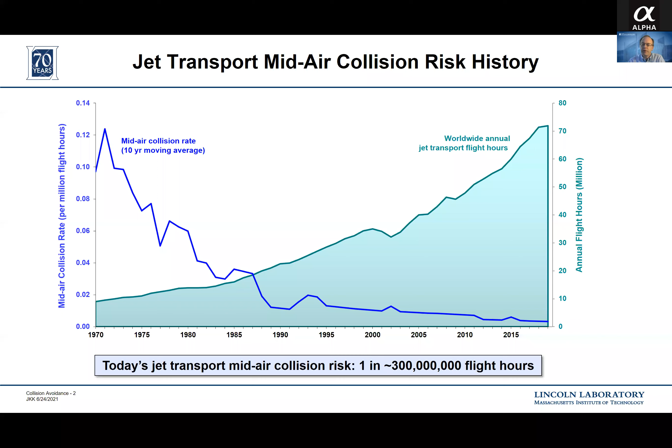If we go back to the earlier years, in the 1950s, there was a very bad mid-air collision over the Grand Canyon, 2 flights flying from the West Coast to the East Coast. At the time, the technology for separating aircraft was very procedural. Aircraft were given altitudes and routes to fly. They periodically would call in on the radio to report their position. And in the best case, there was somebody moving a little marker on a map to see where the planes are and maybe give some changes in their trajectory if necessary.

Obviously, that doesn't hold up very well in the long term with a lot of traffic. And so this mid-air collision really raised awareness in the country that there needed to be a more complete air traffic control system. In fact, that led to the establishment of the FAA. This is one of the precipitating events that got the FAA started. And coming from the FAA, a number of air traffic control technologies followed.

And so this again raised additional awareness that there needed to be yet more protection for this type of an accident. And so there was a congressional mandate for an independent collision avoidance system to be installed on large aircraft by the mid-1990s. And so that led to the airborne collision avoidance technology that I'll be talking about today.

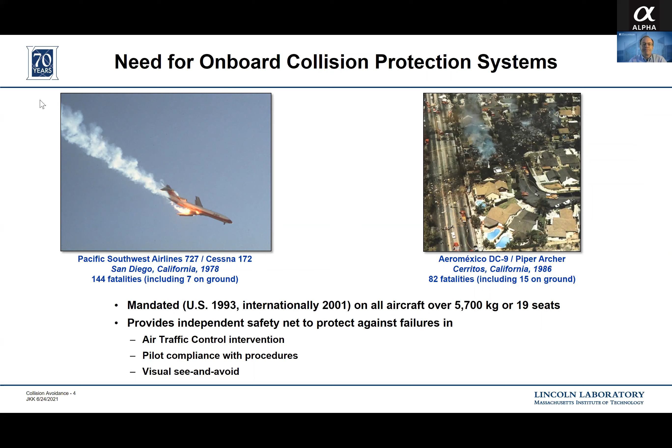And when necessary, air traffic controllers are monitoring the traffic. They may provide directions to the pilots to change heading or altitude or speed to maintain separation. And the goal there is to keep aircraft well separated, typically 3 or 5 miles apart. So there's a lot of space between them and a good safety margin. And for the vast majority of time, that's sufficient to keep aircraft safely separated. But should there be some sort of issue where aircraft do get close, that's where TCAS comes in.

And TCAS itself provides 2 layers. There's what's called a traffic advisory, or TA, which about 45 seconds before a collision would happen, issues a visual indication in the cockpit and also says traffic. And the intent there is to make the pilot aware that there's another airplane nearby. If the weather's nice, they can look out the window and try to find that traffic and make sure that things are going okay in terms of staying separated.

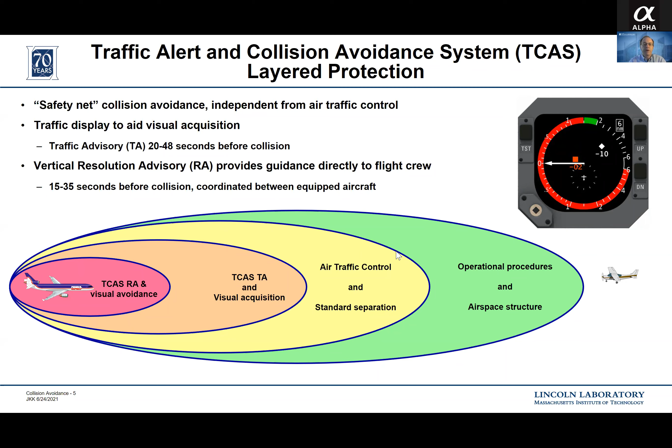And the other aspect of TCAS that was built in is that it's coordinated, so that if 2 aircraft have TCAS, if one climbs, the other airplane will descend, so that they're not both doing the same thing. Obviously, that's an important consideration. So there's sort of a few main components to TCAS. There's a surveillance component, which is obviously needed to know where the other airplanes are and track them over time. So there's technology that was developed to perform that, detecting intruders, what we're calling intruders are just other aircraft, and track them over time.

There's a set of algorithms that then use that information to decide, first of all, does the system need to do something? Do they need to bring the intruder to the attention of the pilot? If they do, what should they tell the pilot to do? Should it be a climb or descent? And then to coordinate that with the other airplane, if the other airplane also has TCAS, like I said.

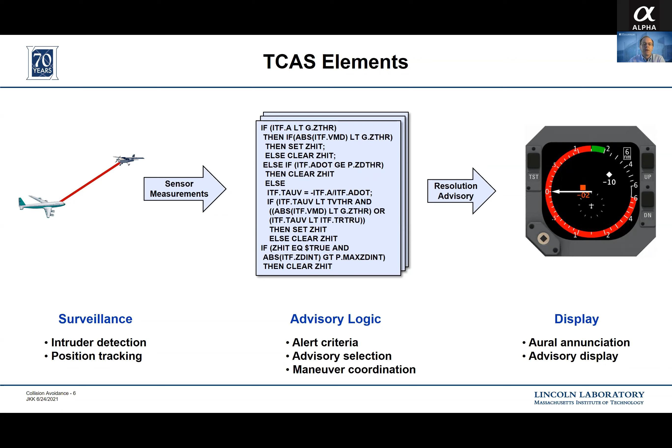And then the third component is the display in the flight deck. There's typically a traffic display and then some other display that tells the pilot what to do, whether to climb or descend. And I'll show an example of how that works in a minute. So this is a system that was decades in the making.

There have been several updates to that system. The first system deployed was called version 6.04a, and then there was a version 7 and 7.1. And most recently, there's a version of collision avoidance called ACAS X that I'll talk about towards the end of the presentation today.

And I'll also be talking a little bit about some of the other work that was going on, both in terms of modeling and simulation to build the system, and then flight testing to demonstrate that the system in real life operated with the same performance as had been assumed in some of the models. And then there's additional work in coordinating the maneuvers through the data link, assessing how well the system's working in operations, and making some additional improvements in the surveillance technology.

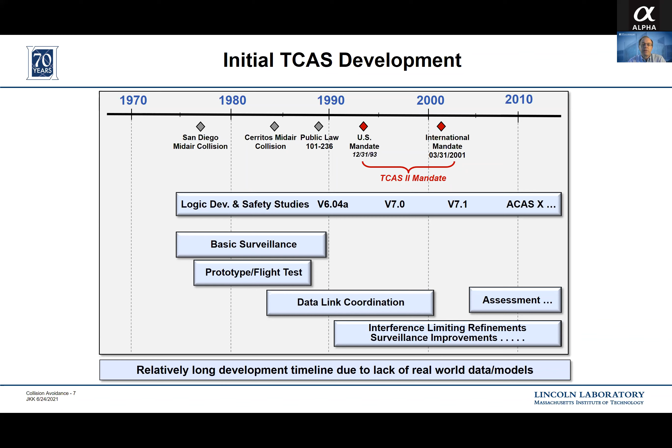So I'll talk a little bit about first the surveillance component, and I'm going to just touch on a few parts of this. But TCAS is based on the same surveillance technology as the rest of the air traffic control system was built on at the time, using transponders on the aircraft to help provide additional information to radars or other aircraft.

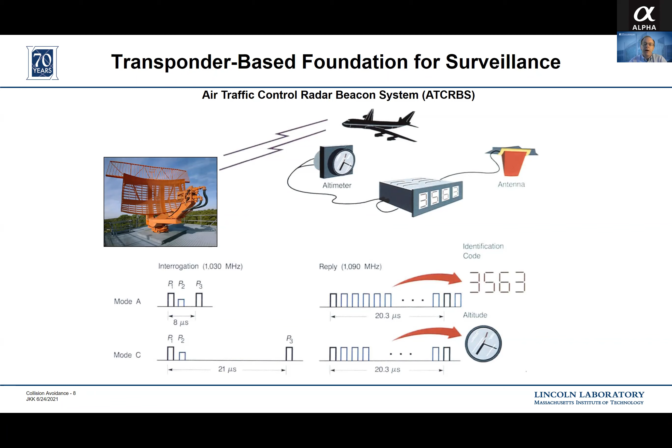Now, there's actually been some really interesting work done to extract as much as you can out of those overlapping messages, which I won't get into, but it's one of the challenges with that initial beacon system, that you have these overlapping messages potentially that make it more difficult to track aircraft.

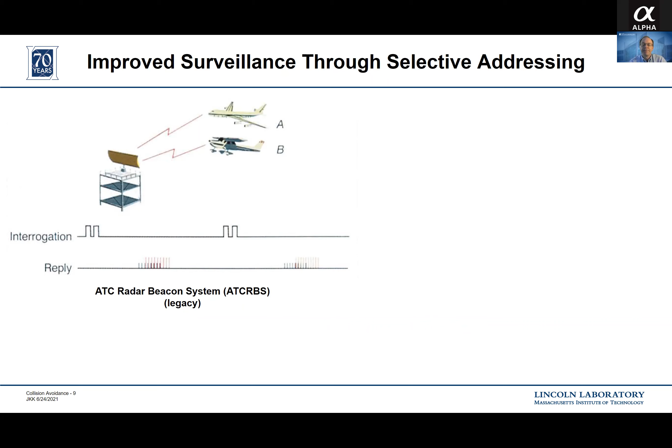So one of the technology improvements that was done was to develop what's called the mode select or mode S transponder system, which uses the same frequencies and the same basic waveforms and interrogations, and it's backward compatible with ATCRBS. But the interrogation message is a little different. It encodes a particular aircraft's identity so that you can interrogate specific aircraft now, and just that airplane, when it receives that code, knows that it's going to reply. And if a transponder receives some other airplane's code, it doesn't reply.

And instead of 4096 different codes, this uses a 24-bit ID, which is many times larger. Each airplane has a unique code. It's basically built into the transponder what its ID code is. So every plane in the world has a different 24-bit ID.

And that allows a radar, like I said, once it knows who's out there, to interrogate airplane A and then schedule an interrogation for airplane B. And the radar technology is smart enough to space those interrogations out so that the replies won't be overlapping. And so that's really the fundamental technology here that allows radars to track different aircraft reliably and get data from each aircraft uniquely.

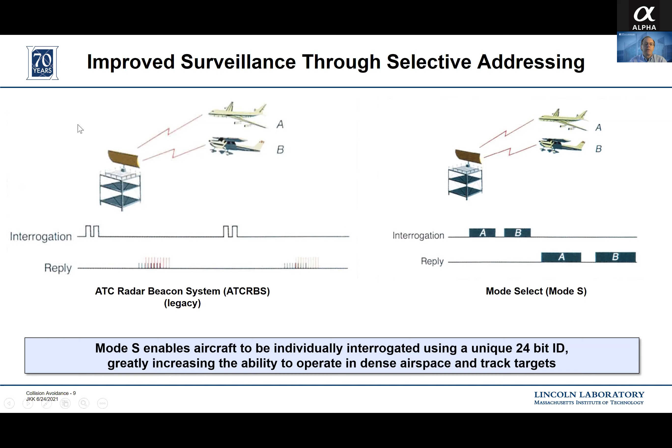So that's basically how TCAS works in its surveillance. So again, it's independent of ground radars. It does it all by itself on the aircraft. It will detect and track airplanes automatically that are flying around.

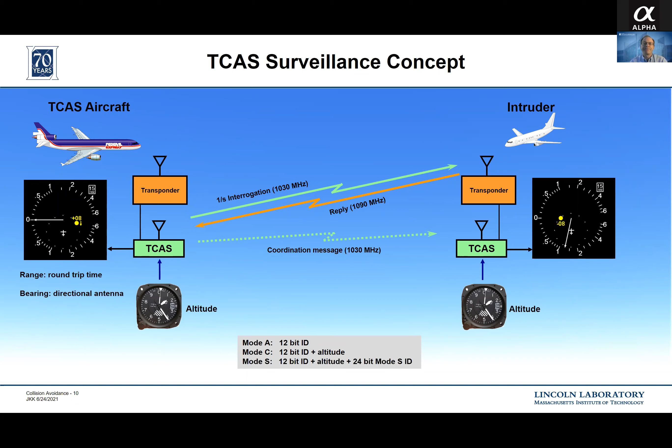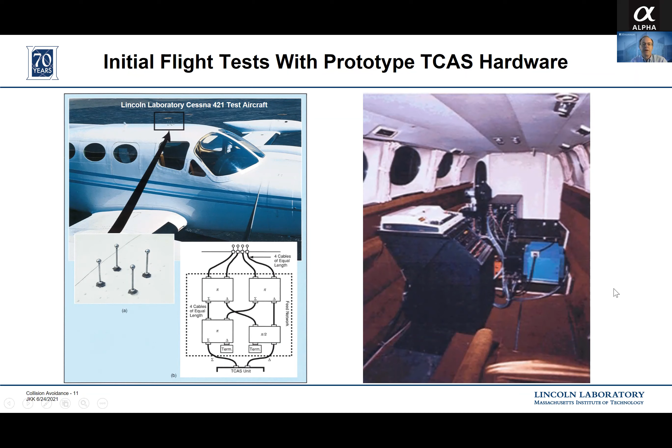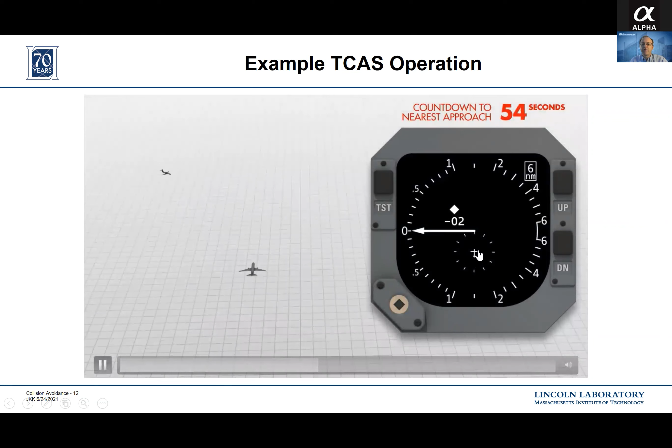So I'll just show an example of how this works. So this is running a little animation here. We've got 2 planes coming. And again, as you can see here, this jet airplane is this little cross. This other airplane is 200 feet below us. It's at about our 11 o'clock position and getting closer. And I don't have the sound turned on, but when it gets about 46 seconds away or so, again, TCAS is tracking that and says, hey, you're getting a little close here. I'm going to warn the pilots about this other traffic.

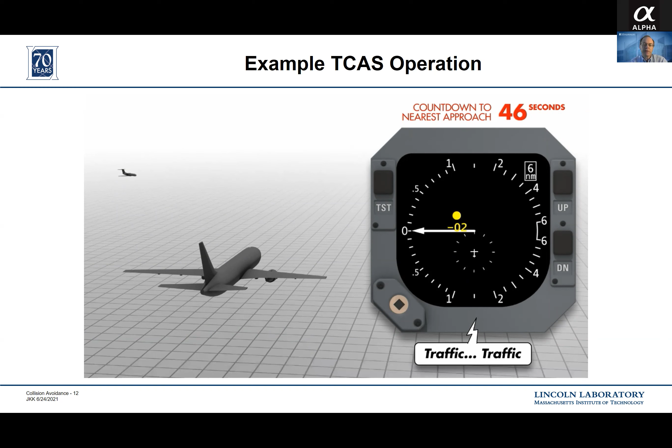And so it says traffic, traffic. The symbol turns to a yellow circle to help highlight that. And at this point, the pilot then can start looking out the window or start asking air traffic control what's going on, or just be ready to do something if things get worse.

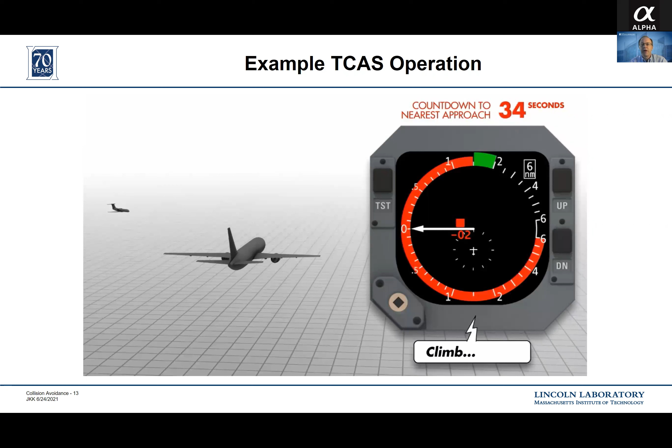And if things do continue to sort of degrade as the planes get closer together, the system continues to track, and at some point it decides that this is getting too close, and it issues this resolution advisory. In this case, it's saying climb, climb, and this display has sort of two aspects to it. It's a very complicated display in some ways.

It is showing not only sort of a top-down view of where the traffic is, but then this dial on the outside is the vertical speed indicator. So this arrow is indicating whether the aircraft is climbing or descending. Right now we're level. And what this red arc is telling the pilot is that they need to increase their climb rate until they get to the green. So basically to 1,500 feet per minute or more.

So the pilot would disconnect the autopilot and pull back on the yoke and then start to climb. And you can see the vertical speed starting to increase. As the plane climbs, the other airplane is getting farther below. So that's a good sign. It's now 500 feet below.

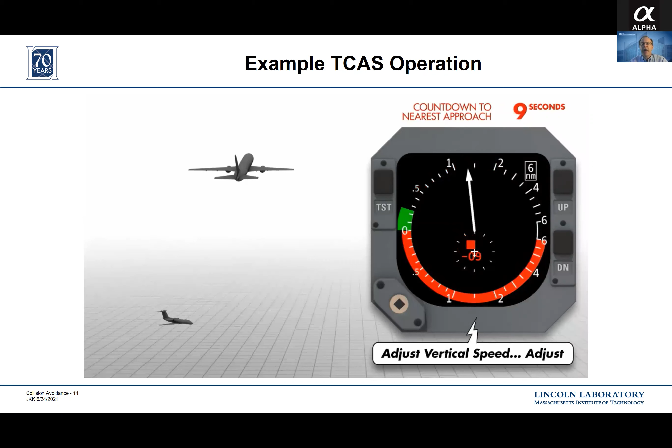And when it gets far enough away, the system says, okay, we've gotten enough separation now, things are safe, and you can return back to level flight. And then once you actually start to increase in range, the system says, okay, now the situation is cleared and you can go on back to your original clearance and fly along. So that's basically how the system operates.

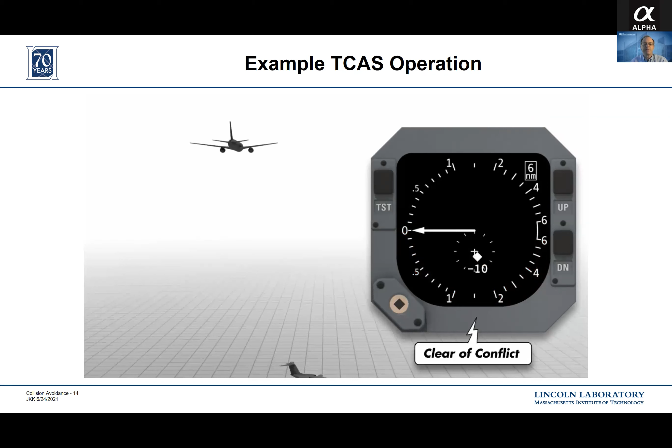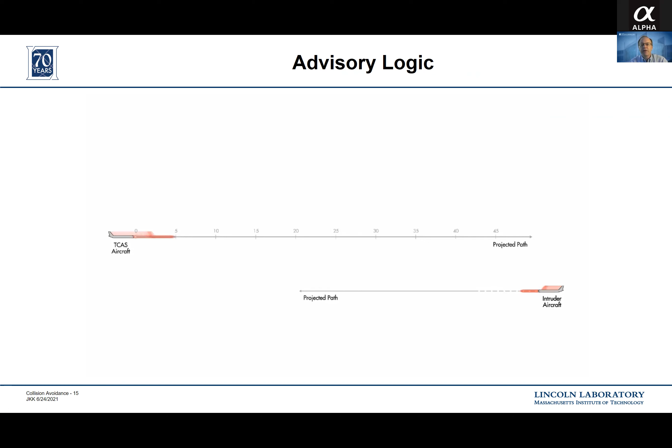And then internally what's going on is, TCAS, a little simplification here, but it's basically doing a straight line projection based on what the system knows about what your own airplane is doing and what it's finding out from this tracked airplane. So it projects ahead in time and looks to see where along those straight lines those planes are going to be closest and how far apart they are going to be vertically.

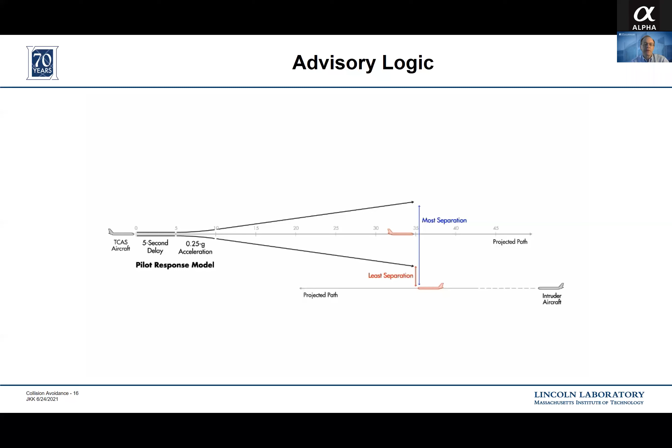And if that's a small enough miss distance that the planes are going to be too close, then it runs another algorithm to basically look and see should we climb or descend to avoid this threat. And that model assumes it's going to take about 5 seconds for the pilot to react to the resolution advisory and then climb to that 1,500 foot per minute climb or descent rate. And the system will select the sense, climbing or descending, that gives the most separation. So in this case, it looks like a climb would be better than descending.

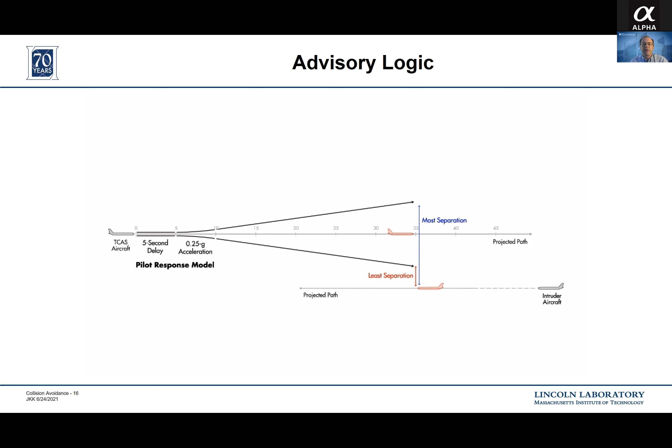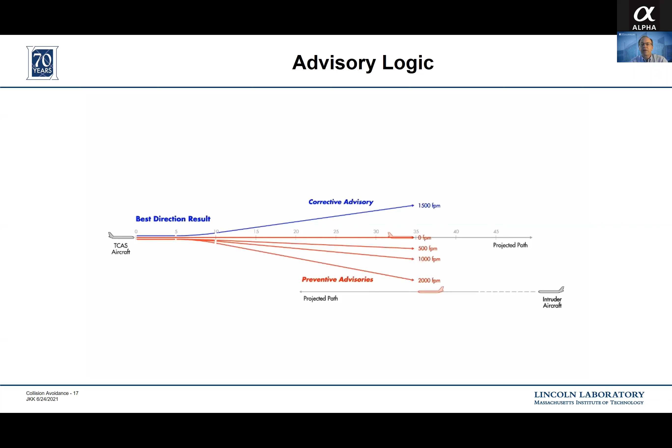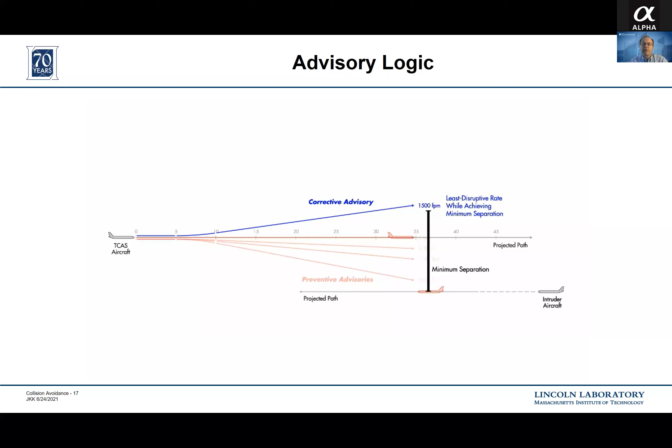And then it will actually evaluate a few different alternatives to see if maybe something a little bit less aggressive is still sufficient. So it will look at not just climbing, but maybe what if it just tells the plane to not descend or not descend faster than a certain rate? And it will sort of evaluate those against some minimum separation that it's trying to achieve. In this case, none of those more gradual advisories are sufficient. So here it would tell the plane to climb at 1,500 feet per minute.

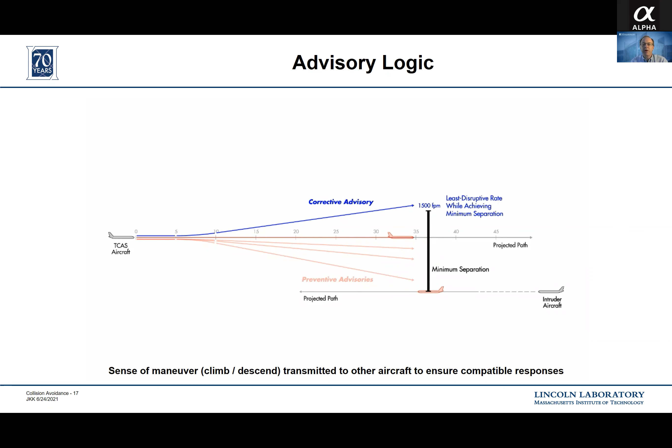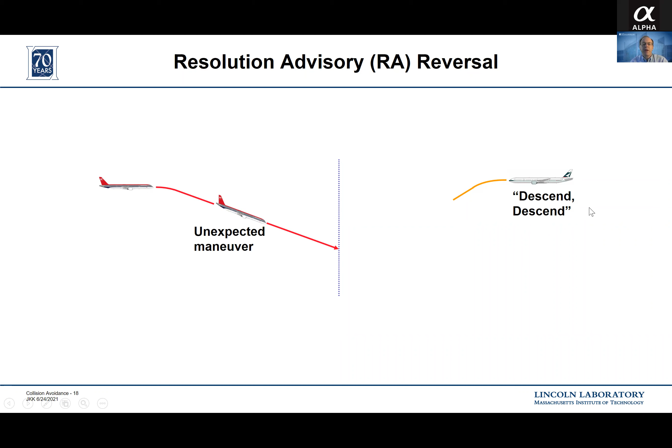And again, the sense of that maneuver, whether it's climb or descend, is communicated to the other airplane to make sure that it does the opposite. One other aspect of TCAS that's important is that it can reverse the sense of that advisory. So if one plane starts to say descend, and the intruder airplane does something unexpected, like it also descends for some reason, the algorithm can determine that and switch the sense to tell the plane, okay, this isn't working anymore. Instead of descending now, you need to climb.

And it gives a little bit more of an emphatic indication, climb now, to kind of get the pilot to change the sense that they were involved in. So that's the basic idea behind how TCAS works. And it's been extremely effective, a very strong component of what brought that collision rate down that I showed on the first slide of the presentation. There have been a number of cases that have been reported saves due to the system intervening.

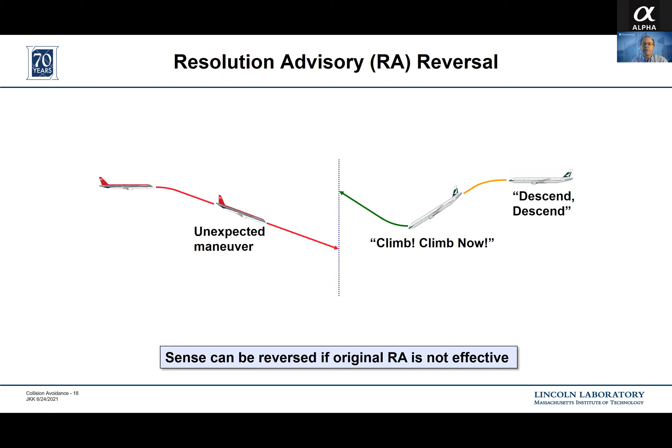However, there have been some issues. So there was one accident in 2002 where a Russian passenger jet collided with a cargo aircraft. This was in the middle of the night over southern Germany. And what was especially troubling was that both aircraft had TCAS on board. So obviously, a lot of concern and scrutiny over what was going on and why this happened.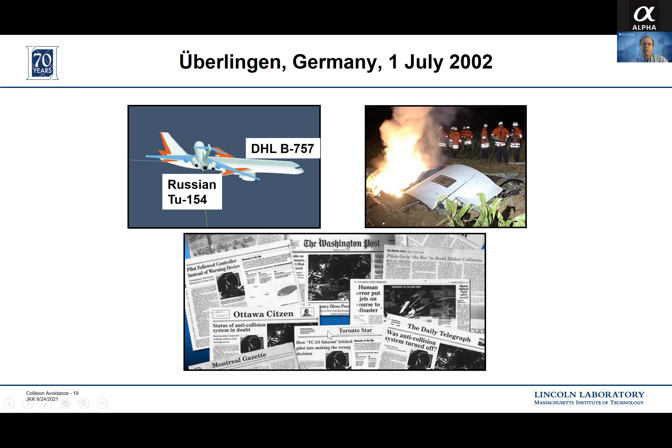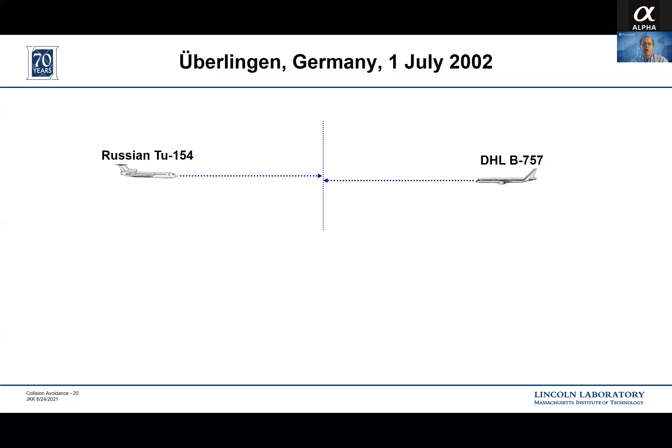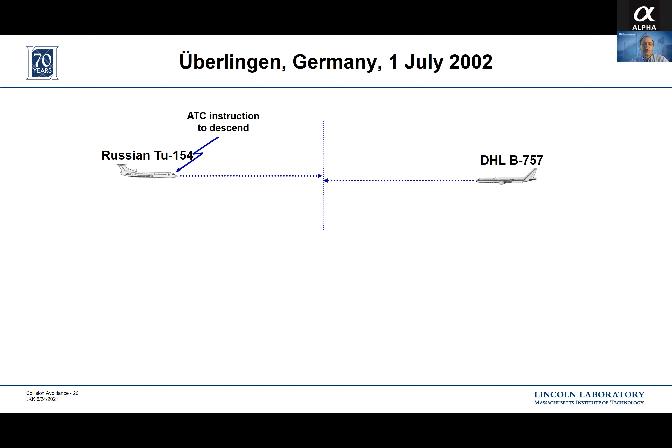And, something of a simplification, but this is sort of showing a side view of the two planes. What happened was there was a very late instruction from an air traffic controller to the Russian pilot to descend. They're starting to get very close, and the air traffic controller told the Russian airplane to descend. And at just about the exact same time that happened, the TCAS unit also triggered a resolution advisory telling the Russian plane to climb and the cargo plane to descend.

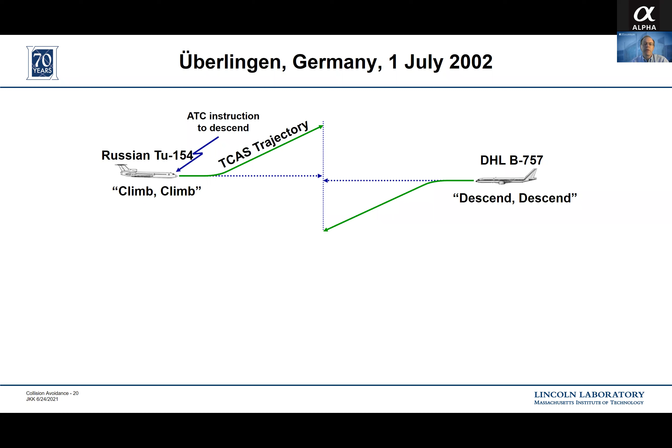And the Russian pilots had been trained to follow what air traffic controllers told them and not follow what TCAS told them. And so they actually descended instead of following what TCAS was telling them. The cargo aircraft on the right followed its TCAS RA and descended, and both aircraft basically descended and collided into each other. And so the key question is, why didn't the sense of TCAS reverse in that case?

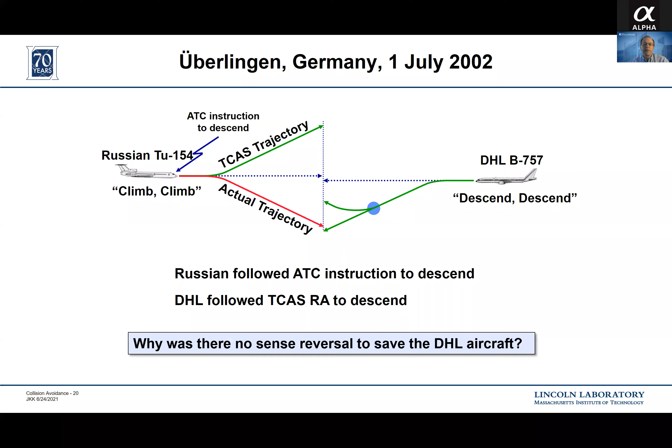What was going on? And I won't go into the details. It's actually a fascinating story in terms of the algorithm and why it failed in this particular case. But roughly speaking, the algorithm was designed assuming the pilots were going to do what it tells them. And here's obviously a case where they weren't.

And so there was a pretty strong response, especially in Europe where the accident happened, first to increase pilot awareness that they need to follow the RA, that the system on board knows more accurately what's going on than the air traffic controller does. It's coordinated with the other aircraft, so they really need to follow what TCAS tells them.

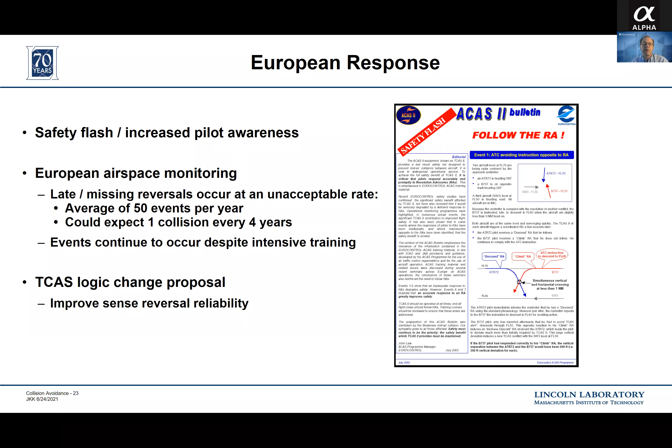It was also identified that these types of events were happening very often, more often than we would really want, many times a year. And so it was a significant enough concern that there was a large effort to make some changes to the algorithm to prevent it from happening again. And so there was a change proposal built to basically make it more likely that TCAS would reverse its sense and prevent that kind of a situation from happening.

And so at Lincoln Laboratory, we got involved in this in the early to mid 2000s through a series of modeling and simulation activities to first model all the different components of the airspace, how airplanes fly, run simulations to quantitatively estimate how well TCAS would work, and then from those safety metrics, make a decision about whether a given change in the algorithm was actually going to be safer than not changing it.

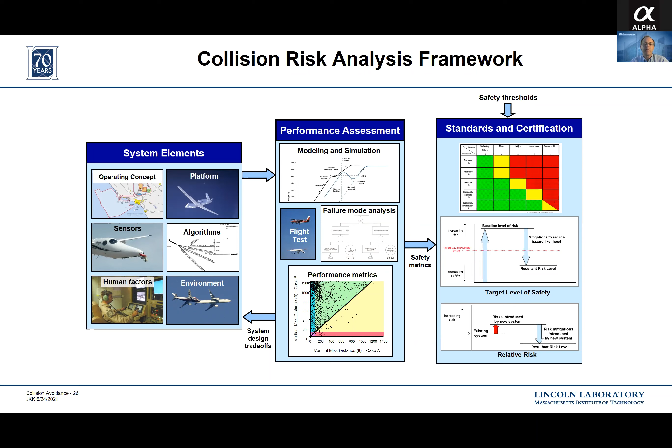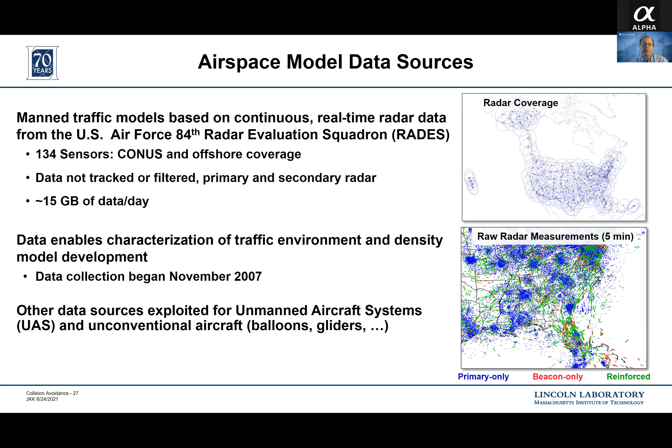And to do that, we used a large number of radars across the country to build an accurate understanding of how aircraft fly around. So this was an effort that began in 2007, pulling data from radars all across the US, building thousands and thousands of flight tracks that we could then use to represent aircraft motion in a statistically accurate way. And we also built other models for other types of aircraft, like unmanned aircraft or gliders and things like that.

So we built a series of encounter models, they're called, that using all that radar data, we then built a Bayesian model that allows us to represent the probability that an aircraft in a given position is going to, say, turn or climb or change speed.

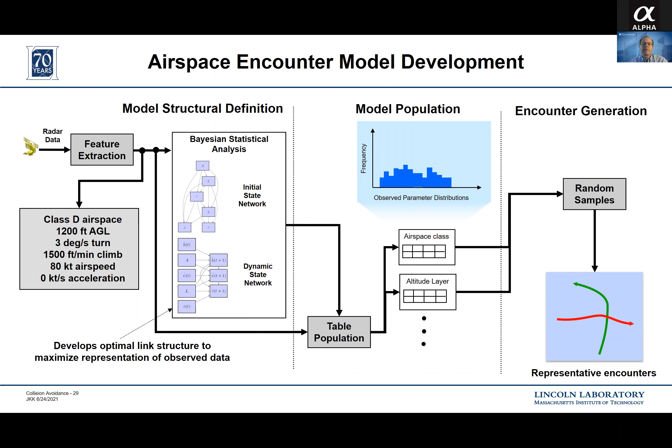And so from that, we can populate a set of data tables that are representing what we've been observing in the actual airspace, and then randomly sample from those basically to build these synthetic trajectories that we can use in a simulation. So we have the ability then to run millions and millions of encounters on a computer that are not just arbitrary, they're statistically representative of what's actually happening out in the real world.

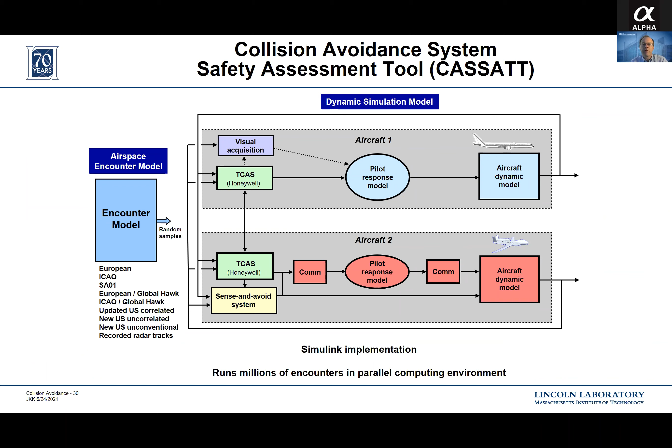And we connected that to a simulation capability called CASSATT, which basically allows us to run a couple different aircraft against each other with the actual TCAS algorithms or changes to the algorithm and different models on board to look at how well that all works.

So this is just an example from one of those simulations, basically replicating what happened in Uberlingen. So those aircraft had version 7.0 on them. The Russian airplane's on the left again, following air traffic control, so it's going to descend no matter what TCAS says. And the aircraft on the right is going to follow what TCAS tells it to do. And when we run the simulation, the aircraft on the right gets a descend advisory. It actually increases. And in the simulation, you can see they follow that and have that collision.

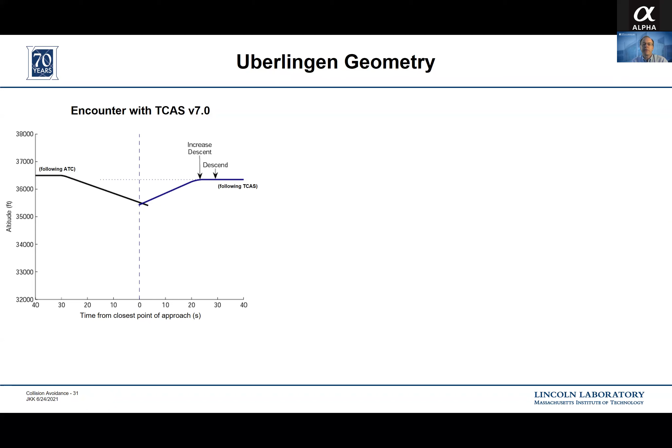So we're able to replicate the bad things that happen with TCAS and demonstrate that, yes, in fact, there is this vulnerability in the algorithm. And then look at some changes that were made to the algorithm that, yes, in fact, we can validate they do successfully reverse the sense. And even though that airplane on the left is descending, the aircraft on the right gets this reversal to then climb. So that's great. So we get confidence then that this change in the algorithm is effective.

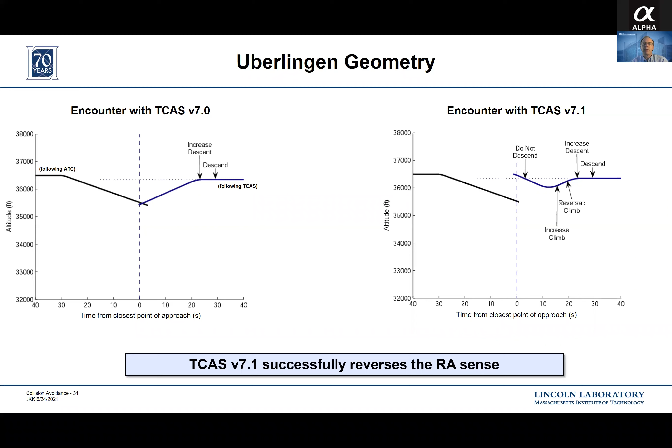The question then is, is it always going to be effective, or is it just effective in some cases? And could it in fact introduce other vulnerabilities or problems elsewhere? So that requires more of a statistical analysis. So I'm going to just show an example here from some runs we ran where basically we want to compare how far apart airplanes are without any change in the TCAS algorithm, which will be plotting that separation distance along the x-axis, and how far apart the planes get if there is a change in the algorithm along the y-axis.

So basically, we're going to run a given encounter twice, once with the original version of TCAS and once with this change built in, and see what happens. Does the change make any difference? And if the change doesn't make any difference, the data point will fall on the diagonal because the separation is the same with or without the logic change.

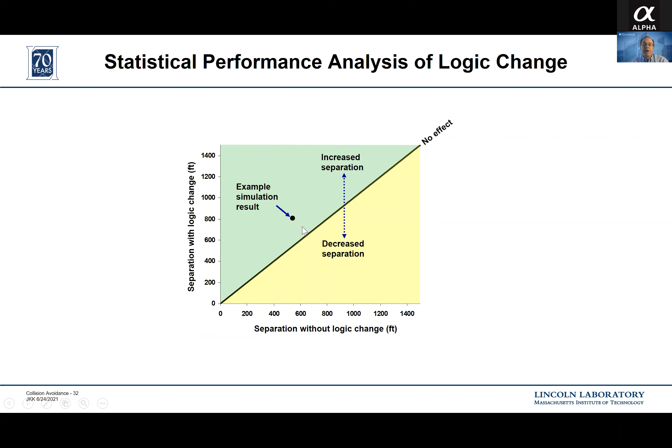But if we have a simulation run that winds up here, for example, where that dot is, that's telling us that with the original TCAS, we would have maybe had a 550-foot separation, but with the logic change, now we're getting about 800-foot separation. So we've made an increase in separation. That's good. If we're below the diagonal, that's bad. We're actually reducing separation. And so what we do is we run these over many cases.

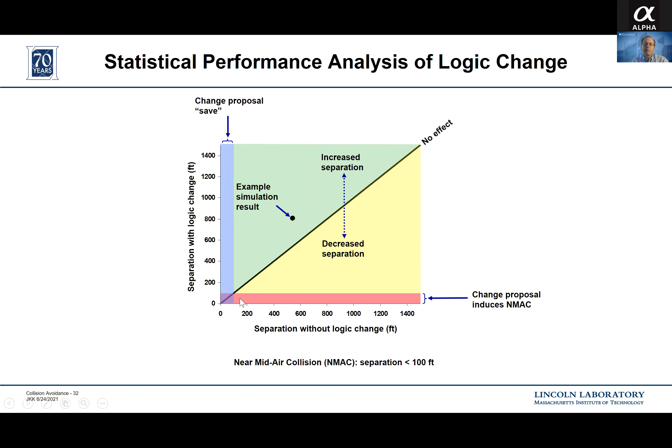We can actually then also pull out cases that would have had very small separation without the logic change but grow into larger separations; those are basically saves where the logic change has prevented a collision from happening. Down in this red zone is where we don't want to be. That's where we would have had large separation without the change, but for some reason with the change, we've actually now caused a collision. And this bottom left corner in the purple, basically those are going to be collisions that neither system could resolve successfully.

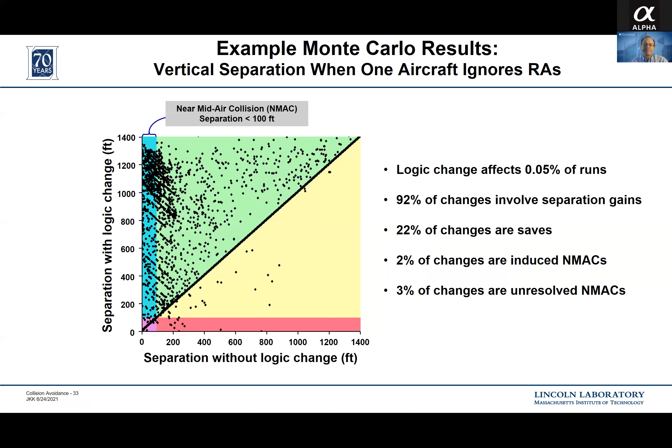So this was one part of the data that helped lead to a decision to go ahead and mandate that change in the TCAS algorithm. So in Europe, for example, starting in 2015, aircraft had to upgrade their TCAS algorithms to this version 7.1 to help prevent that type of an accident from happening again. So again, it's an example of learning from real operations and then making a modification to the system that's been very successful, and there haven't been collisions like that since that change was made.

So today, TCAS, like I said, is extremely successful. It's deployed on more than 30,000 aircraft around the world. There hasn't been a mid-air collision with commercial aircraft in the US since the mandate was put out. Roughly speaking, if you consider the risk of a collision between two airplanes where neither plane has TCAS, if you consider that risk 1, if one aircraft has TCAS, that risk is brought down to about 0.1. And if two aircraft have TCAS, it's brought down to about 0.01. So there's sort of an order of magnitude improvement in safety by equipping an aircraft with TCAS. So again, it's been extremely successful.

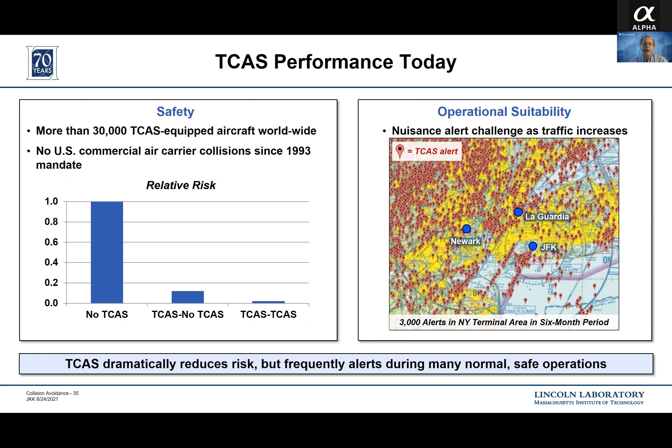What it does say is that, especially in good weather, when pilots are given visual separation, planes can be flying safely together, close enough together that it basically causes TCAS to issue an advisory when it isn't required. And in fact, the pilots are aware of the other traffic. And so it's essentially a nuisance alert that they're getting. And as we want to get to higher throughput operations and get aircraft to fly safely closer together, that's going to be a problem. If the system is issuing nuisance alerts, it can lead to the boy who cried wolf syndrome, where pilots begin to ignore the system when they really need it. So that identified the need to maybe make some additional improvements to TCAS.

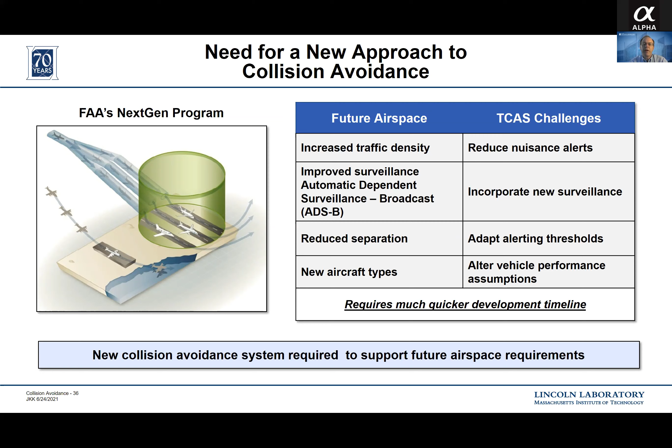So one issue was reducing nuisance alerts. There's also new surveillance out there. There's automatic dependent surveillance broadcast, ADS-B, which is another surveillance technology that could be leveraged. And also new aircraft types. There's unmanned aircraft, which have different performance characteristics than conventional jet aircraft from the 1980s, when TCAS was sort of originally designed. So there's an interest in building a new version of TCAS, but also to do it in a way that maybe didn't take several decades. And so that led to what's called ACAS X, which I'll just briefly give an overview of.

So this was a system that started internally at Lincoln Laboratory with some seed funding, and then the FAA began funding it as a formal program in 2009 with those objectives to both improve safety and reduce the nuisance alerts, to allow reduced separation operations, and sort of help provide better performance for the future. So I'll just quickly go through how ACAS X works and how it's sort of different from TCAS.

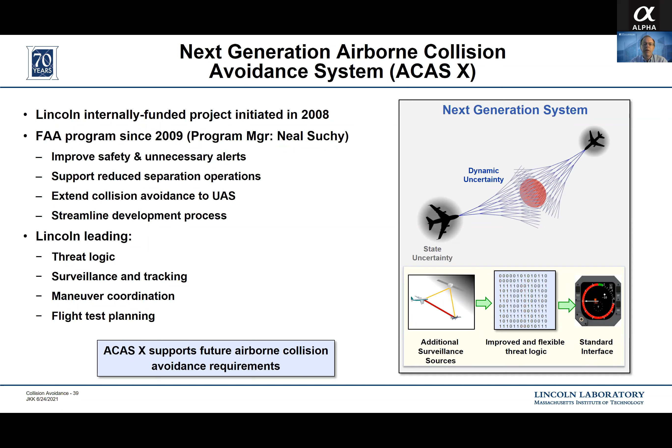So one thing that's different is that ACAS X isn't dependent solely on the 1030/1090 transponder interrogation system that TCAS uses. It does use that, but it can also accept surveillance data from ADS-B or from onboard electro-optical or primary radar systems, say for an unmanned aircraft that might not have a pilot. So there's a surveillance and tracking module that can take in those different types of surveillance sources. It then provides tracks to a threat resolution module, and not only indicates where the aircraft is and where it thinks it's going, but puts basically an uncertainty model on that tracking.

So we're not just doing a single straight line projection of where the aircraft are going to go. It's using a probabilistic projection of where the aircraft might go. And having that probabilistic projection allows the system to make a more accurate trade-off between alerting too early or alerting too late, and basically allows us to make a safer system with fewer nuisance alerts.

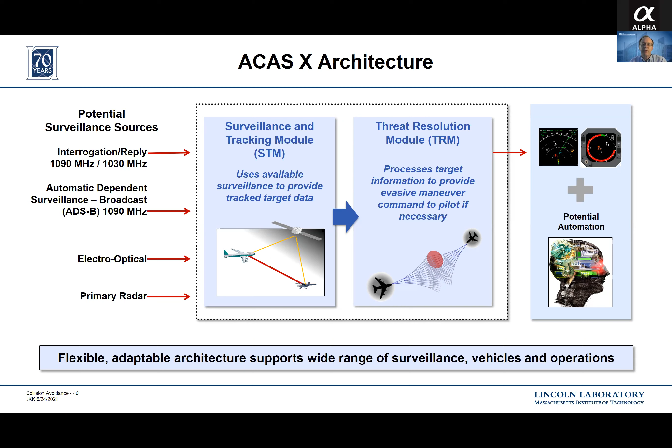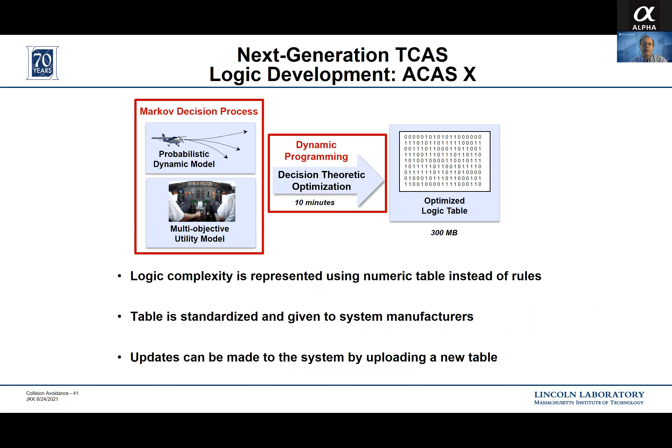So the guts of it involve a probabilistic model of the trajectories, and then a process to sort of optimize that avoidance action. That processing is done offline, so we do that offline using a high-speed computer. It takes about 10 minutes in this example, and then from that we build this table that basically tells ACAS X what to do in any given particular situation it's exposed to, and it's taking into account those uncertainties when it does that. So I'll just briefly go through how that works.

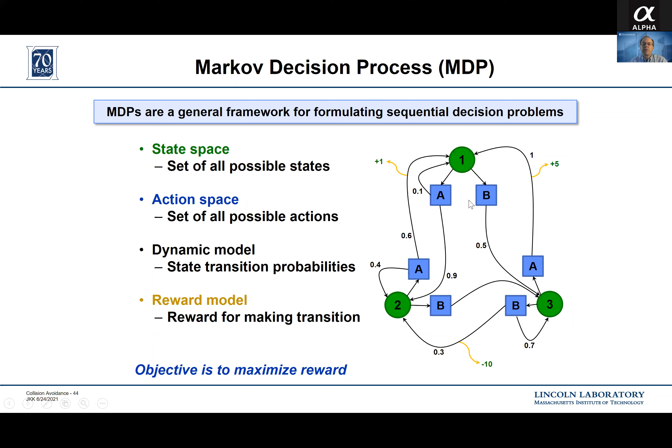So maybe if I'm at the same altitude and I climb through action A, there's a 90% chance that I will, at the next time increment, be above the other airplane, but maybe there's a 10% chance that other airplane also is climbing, and so we actually stay at the same altitude. So you can model those uncertainties, build in rewards for doing different actions. For example, a collision would have a very negative reward, and we want to basically mathematically optimize the decision we make to give the best payoff, best reward.

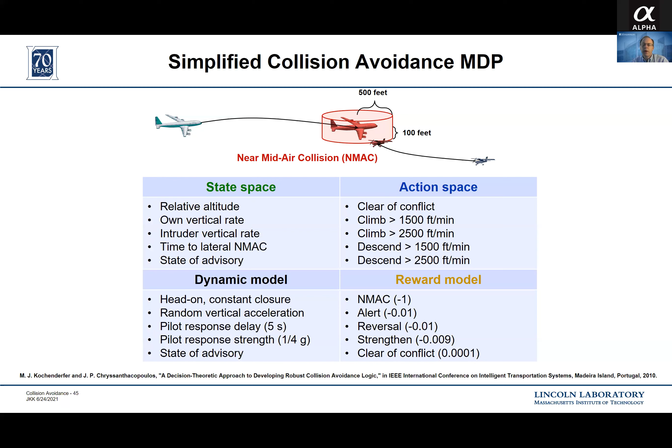So the system uses a number of different states. I won't go through all this in detail, but there's also a number of different actions that might be taken to climb or descend at different rates, and different assumptions on how the pilots might act and different reward values. And so all of this was developed and then tested in the mid 2000s into the early 2010s.

So what you wind up with is basically a table that says for any given set of states in terms of relative altitudes and distances and climb rates and so on, what are the various values or rewards of doing different actions? And the system will pick whichever action gives the best reward. So I'll show graphically how that works. So there's many dimensions to this problem.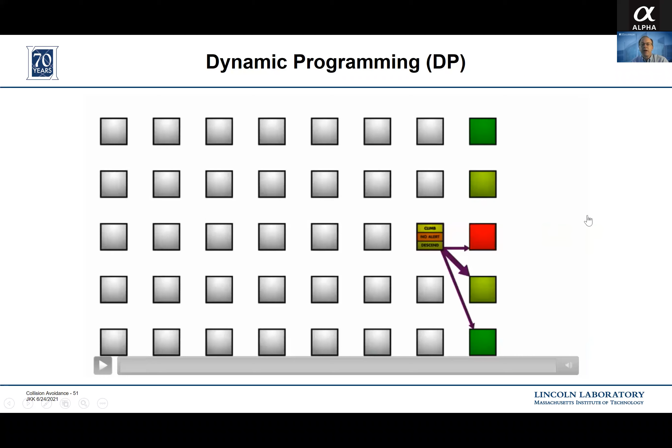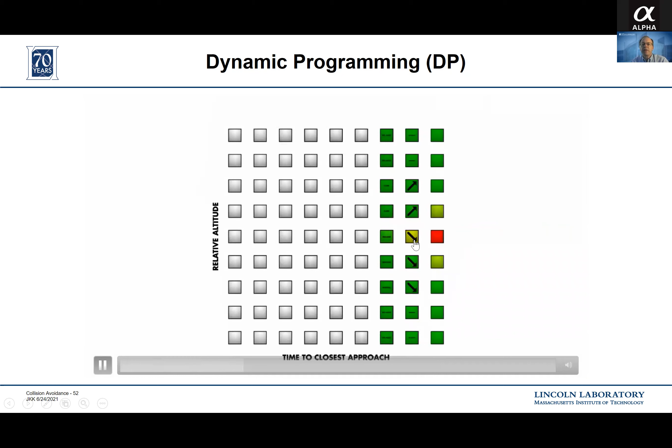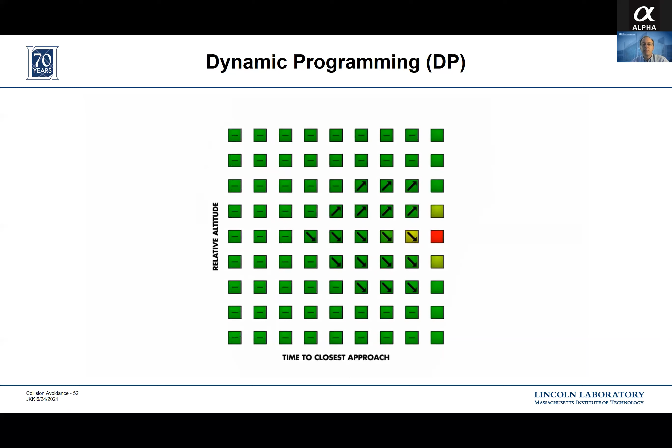So here's what happens if we don't do anything. Here's what happens if we descend. And based on that, we can then build out for each time step what the best thing to do is, whether it's to climb or descend, and then back up through time and build up this table in that way using dynamic programming. And so it's an efficient way to fill out that whole state space in terms of what maneuvers you might want to do based on whether you're above or below an intruder, whether you should climb or descend.

So this is what that looks like in terms of mapping it out. If I have an intruder aircraft, again, stuck here, and I have an airplane that's flying a few hundred feet below it, 20 seconds away, ACAS X is going to tell that airplane to descend if it's in this blue area. If it was in the green area, it would be told to climb.

And one of the really neat things here is this kind of wedge in the middle is telling you that if you're flying towards somebody and at the same altitude, ACAS X will actually wait a little while to get more information about what that intruder aircraft is doing before at some point it says, okay, we got to fish or cut bait now and either climb or descend.

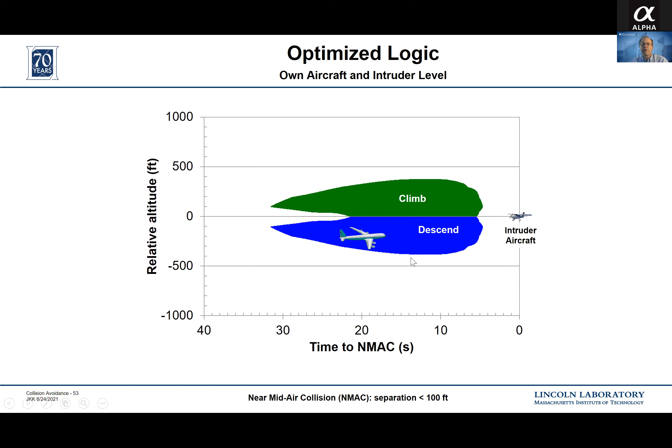And then again, if we were, say, climbing, that plot changes, and somewhere in this blue region, even though I'm climbing, the system is going to tell me I better stop my climb and descend. But if I get into the green area, I'm going to be told to continue my climb, basically to cross through the altitude of that intruder.

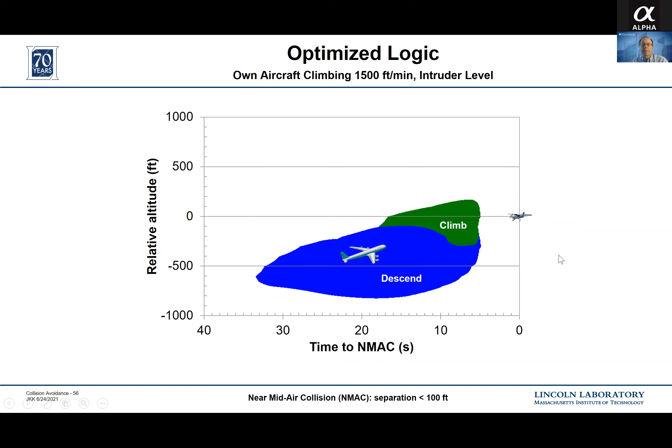So that was all developed through a large number of simulations. There was also some flight testing that I'll just briefly talk about, but the results of at least the modeling were that ACAS X provides about a 20% improvement in safety relative to TCAS 7.1.

So it makes things safer. And importantly, it cuts the rates of alarms down by about 2/3. So far fewer nuisance alerts while still providing even more safe operation. So that's all very positive for the future system. But it was important to validate that through flight testing.

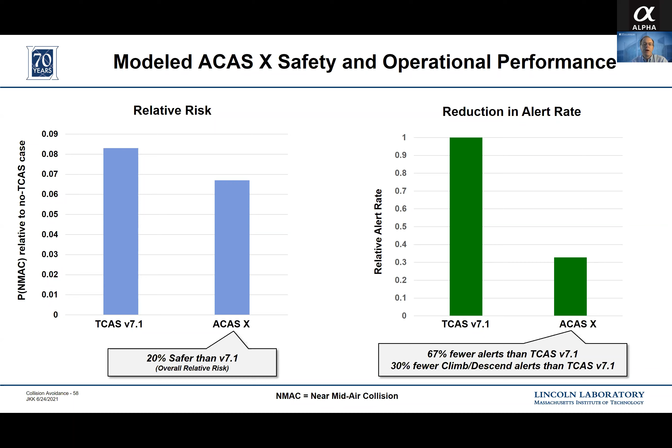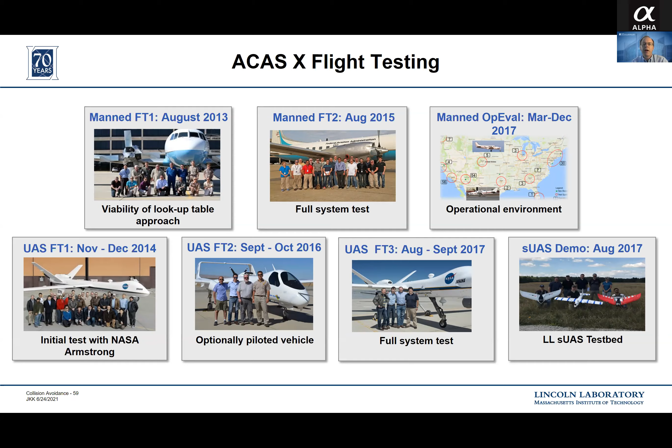So there were a series of flight tests to ensure that the computer models were aligned with what actually happens with aircraft. And these involve both conventional manned aircraft as well as a series of flight tests with unmanned aircraft. And I'll just show one example of one of the unmanned aircraft flight tests. So this was done with NASA and a number of other partners. This is showing their aircraft, which is basically a Predator class unmanned aircraft with a manned intruder airplane.

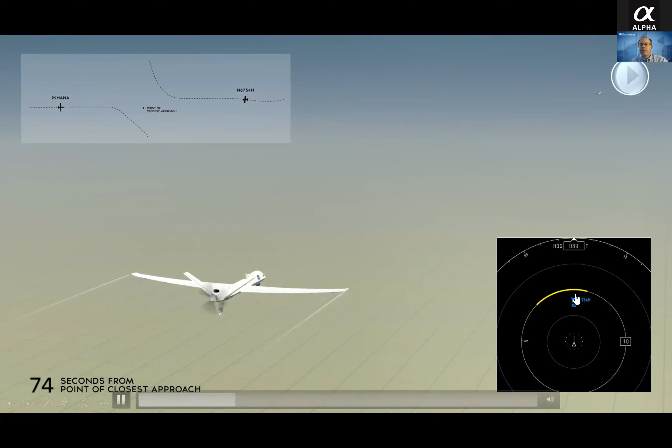In the bottom right, you can see the traffic display that shows the unmanned aircraft here in this triangle, and the intruder coming in as this blue wedge. There's sort of an inset here showing an expanded top view. And what ACAS X is doing is this yellow band is basically indicating that if you continue on headings in this range, it's likely you're going to have a more serious traffic conflict with that airplane. So it's continuing to monitor the situation.

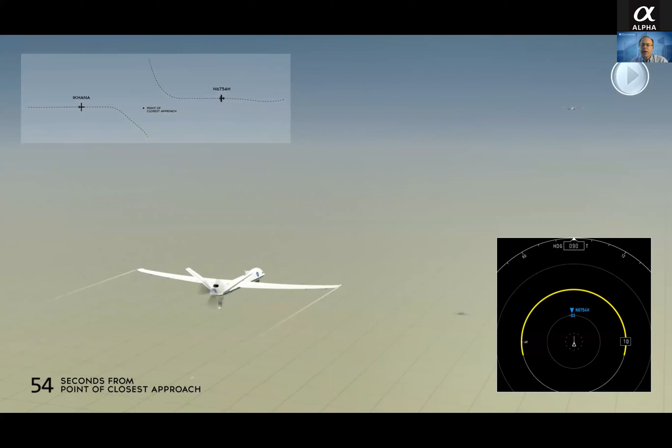And as we get closer, it's becoming clear that there's less and less maneuvering room for us. And at some point, when it gets close enough, ACAS X will then issue a recommendation here to turn right to a heading 115, for example. And in this case, we're going to allow the planes to continue straight because, again, we want to really just validate that the timing of these events is happening according to the computer model. So we actually don't have the unmanned aircraft turn just yet.

And then when we get to this red point now, that does initiate a maneuver, and then the unmanned aircraft will start to turn to follow that advisory. So we ran through a large number of flight scenarios like this to validate the computer models, to again build that confidence that the system was going to operate as designed.

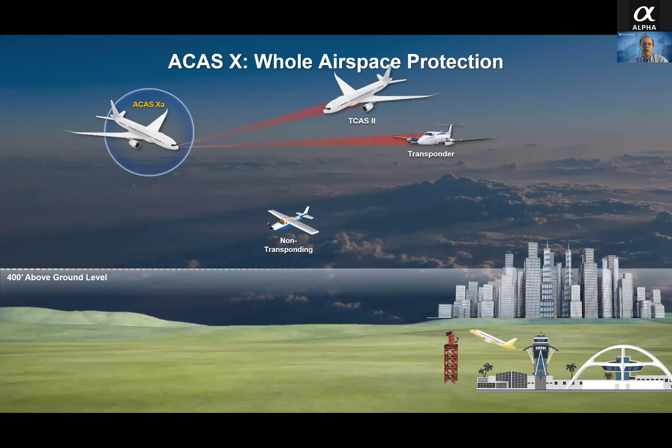So just to close, ACAS X is sort of the next generation of collision avoidance, and there's a number of variants of it that have been developed. ACAS Xa is for manned aircraft, and it operates very similarly to TCAS in the sense that it will track transponder-equipped aircraft and other TCAS-equipped aircraft, but it will not track aircraft that maybe don't have a transponder. It still needs that transponder message.

There's another variant, ACAS Xu, that's designed for large unmanned aircraft that has the functionality of ACAS Xa, but also allows the use of a primary radar on the aircraft, for example, that could detect non-transponding aircraft. And it also allows for lateral left-right maneuvers in addition to the climb-descend that TCAS and ACAS Xa do.

And then there's another variant for small unmanned aircraft called ACAS sXu, and that could actually be running on the ground through a computer on the ground because the smaller UAS may not have the ability to carry the processing to run the algorithm. So this might be a system that runs on the ground and then uplinks maneuver commands to the small UAS based on other surveillance data.

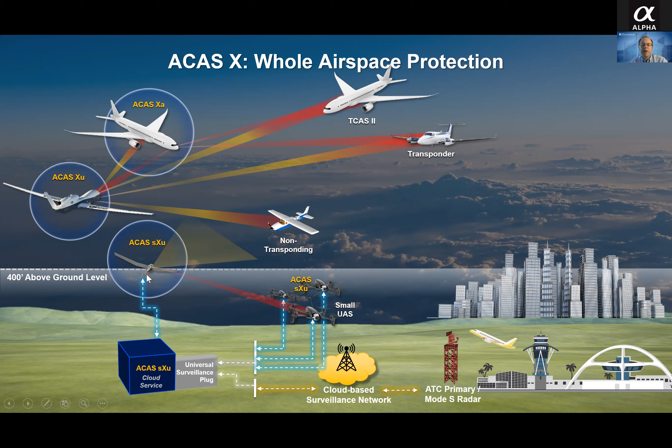And then the final variant is called ACAS Xr, which is designed for rotorcraft. So here you not only can turn left, right, and go up and down, but you can also change your velocity, maybe go into a hover. So that system has even more maneuvering capability and is a potential solution for the urban air mobility problem where you've got, say, vertical takeoff and landing aircraft flying around.

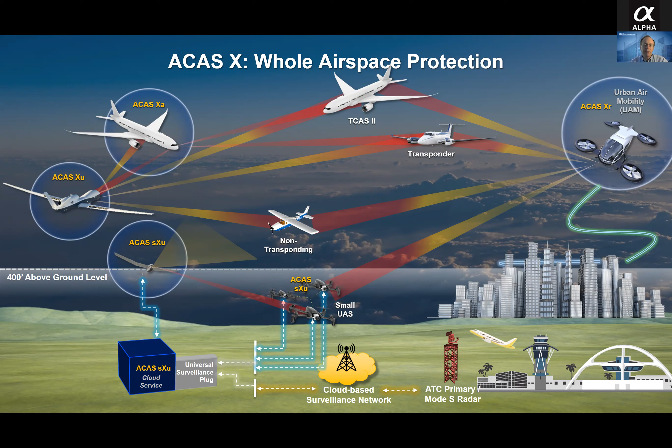So that's a quick run through some of the history of the development of TCAS, some of the changes that were made along the way, and sort of where we're going next with ACAS X. Again, I just really want to point out this involved a number of organizations, many dozens of people working really hard to build that surveillance technology, the threat logic, to do all the safety assessment and build the safety case, involving partnerships between the FAA and industry and academia, working internationally to get approval for that, flight testing and so on.

And we're really excited about this next version of TCAS called ACAS X that allows even more safety and fewer nuisance alerts and really opens up the world for all these new types of aircraft that are coming along. So with that, I'm happy to answer any questions.

Thanks, Dr. Kuchar. There's 3 questions from Tom Stagriano. So I'll read out the first one. So is TCAS or ACAS X, I guess, are they cost effective for near-term use by commercial UAVs, UAMs, and other new type of aircraft that's coming into urban air taxi type applications?

Right, yeah, so I mean, that was one of the critical, going back a little bit to the development of TCAS itself, was the need to make a system that is both effective and also makes an economic case for aircraft, especially airlines or general aviation users, to put this equipment on their aircraft. It has to be economical and make that case.